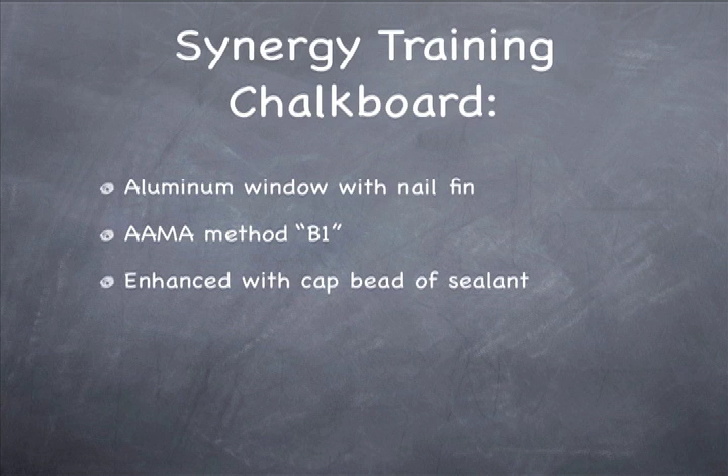We installed an aluminum window with a nail fin using AAMA Method B1. We enhanced our installation with a cap bead of sealant, and we used a membrane pan system. This is also referred to as a drainage method of window installation.

Of all the details you have to get correct, and you have to get them all correct, the most important detail is the rough opening. Without a good rough opening, nothing good's going to happen. If you or your guys walk up to a rough opening that's incorrect, I want you to not install the window.

If you're using a pan system or a drainage method of window installation, the rough opening width should be 3/4 of an inch wider than the net frame size of the window. If you're not going to use a pan system or a barrier system, the rough opening width should be 1/2 an inch greater than the net frame size of the window. The difference is the buildup of materials—pan system has more materials, needs a little wider rough opening.

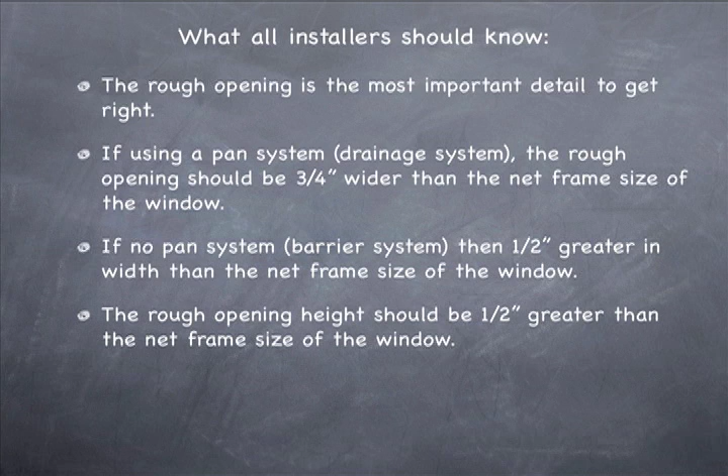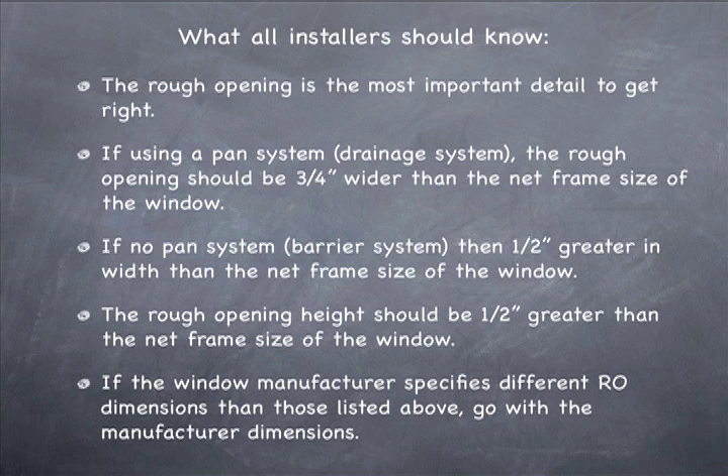The rough opening height should be 1/2 an inch greater than the net frame size of the window. In the unusual circumstance that a window manufacturer has actually supplied you with almost any information at all, if their information conflicts with what I'm telling you, go with the window manufacturer's dimensions. It's probably not going to happen, but if it does, use the manufacturer's dimensions.

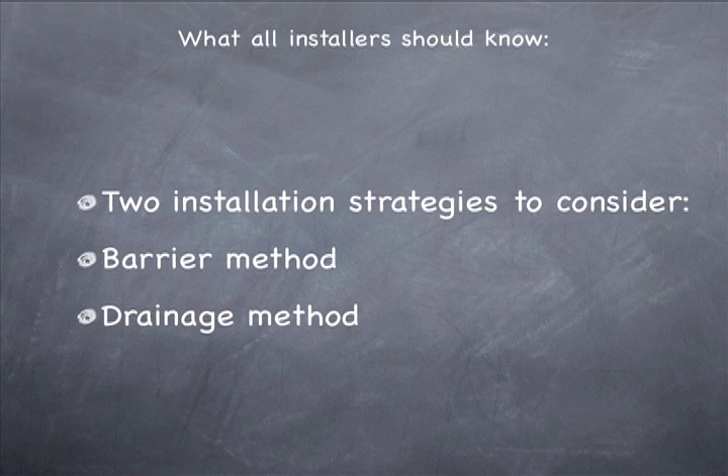You've got two installation strategies to consider: you can use a barrier method, or you can use a drainage method. I'd urge you to base your decision upon your philosophy about whether or not all windows are going to leak someday.

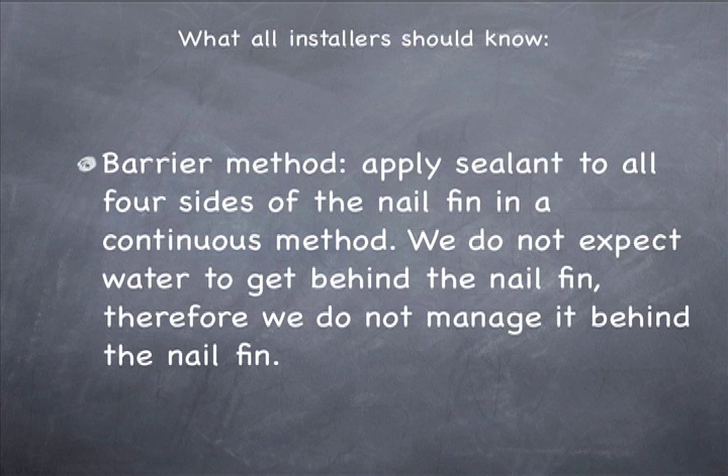A barrier method: we apply sealant to all 4 sides of the nail fin in a continuous method. That's because we don't expect water to get behind our nail fin. Therefore, there's nothing to manage, no water to manage.

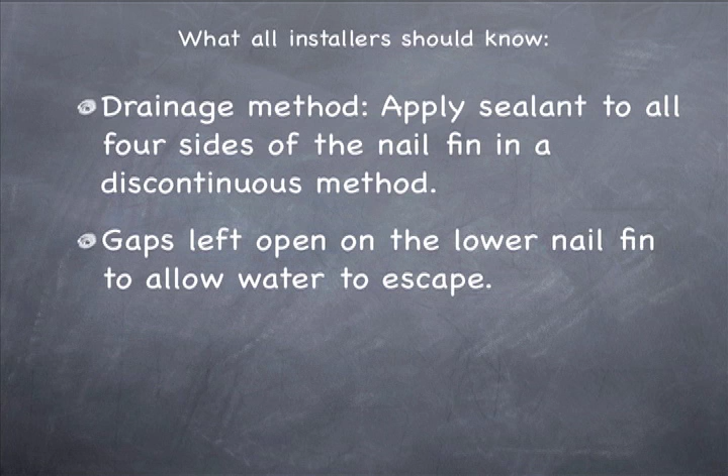A drainage method: we apply sealant to all 4 sides of the nail fin in a discontinuous method. We're going to leave gaps, 3-inch gaps, at the lower nail fin to allow water to escape. This is because we expect water to get behind our nail fin at some point in the future, so we're going to manage that water with the pan system.

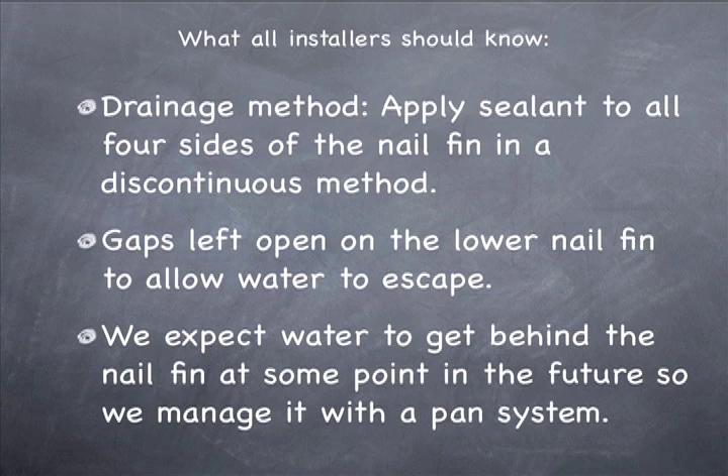Now, I get this question a lot: what is flashing? I think everybody, especially a window installer, needs a good definition for flashing, and here it is. Flashing is sheet material that's used to span gaps and manage water away from areas of the wall system that are designed to be kept dry.

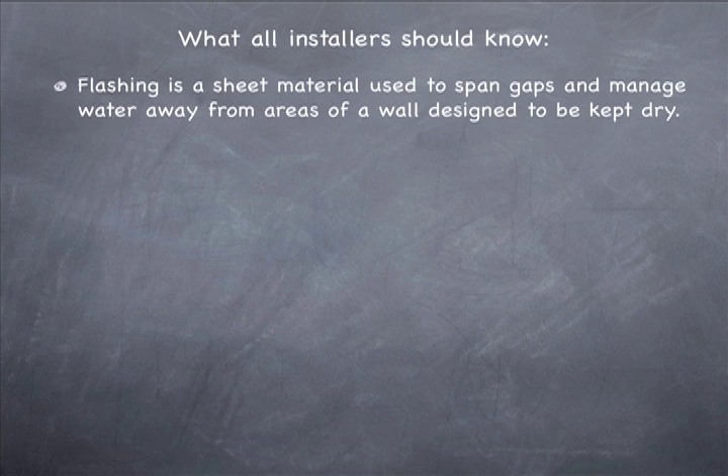AAMA Method B1 uses side flashing that's under the side nail fins. That's the main difference between the B1 method and the A1 method. In the A1 method, flashing goes on top of the nail fins.

All your flashing products should be 9 inches or wider. You're normally going to have a choice between 9 and 12 inches, and either of those choices is fine. I'd urge you not to use 6-inch.

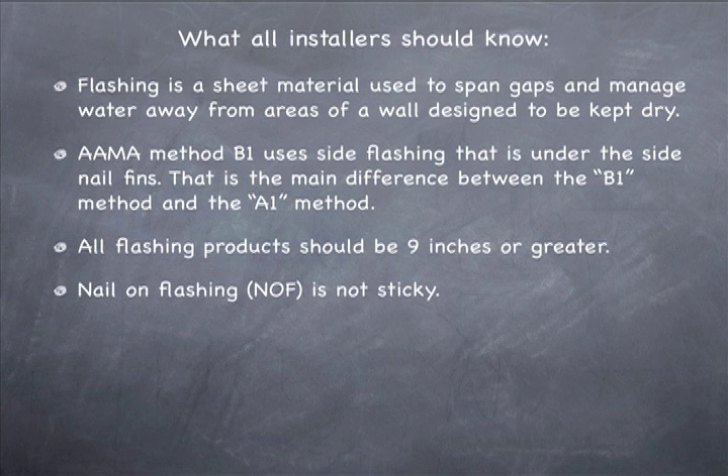NOF, you'll see in print, stands for nail-on flashing, and it is not sticky. SAF, self-adhered flashing, has a release sheet and is sticky after the release sheet is removed.

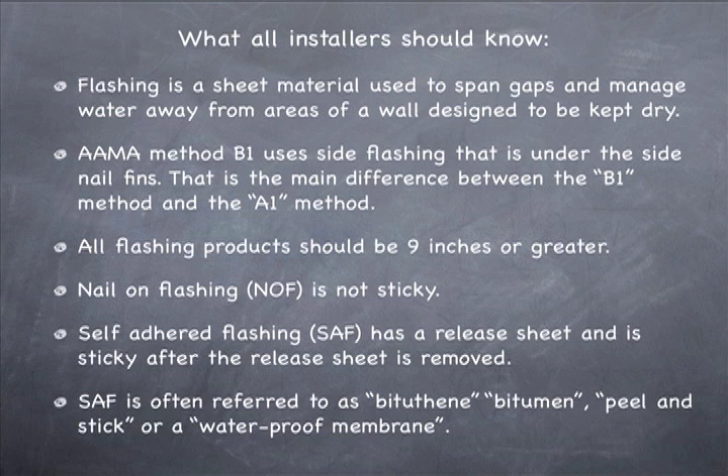SAF is often referred to as bitumen, a peel and stick, or just a waterproof membrane. SAF membranes are most commonly made from SBS modified asphalts, which stands for styrene butadiene styrene, and that's way more information than you need to know.

Often this is referred to as rubberized asphalts. I want you to exercise extreme care when you're using these products over sealants. Some sealants will liquefy these materials, and that's really bad—you'll have black drips running down the side of your wall, and it's just really a bad thing. So consult your manufacturers and use sealants that are compatible with your SAF membranes.

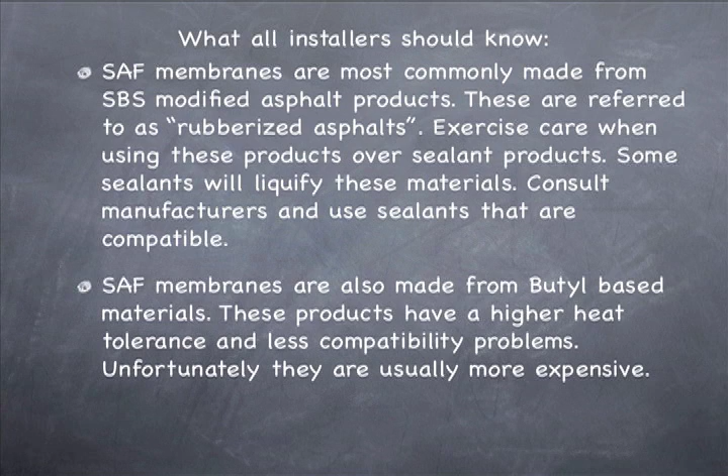Now there's another type of SAF membrane that's made from butyl, a butyl-based SAF membrane. These products are real friendly with other materials. I don't know of any compatibility issues with other sealants, and they have a higher heat tolerance. So butyl is really a terrific waterproof membrane. Unfortunately, as you can imagine, they're more money.

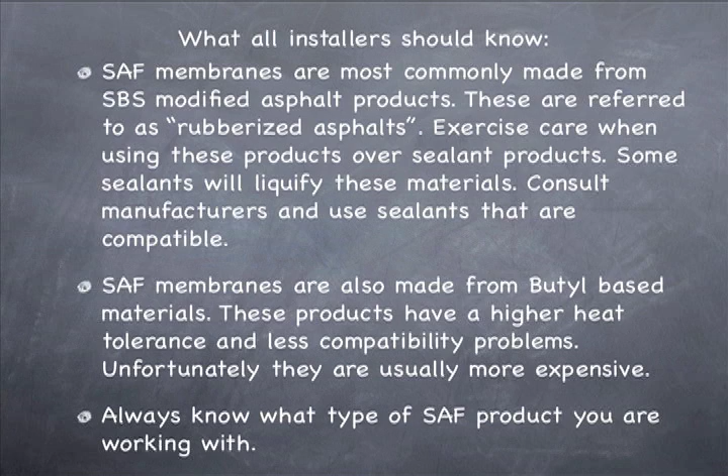You should always know what type of SAF product you're working with so you can exercise the correct amount of care when you're working with sealants.

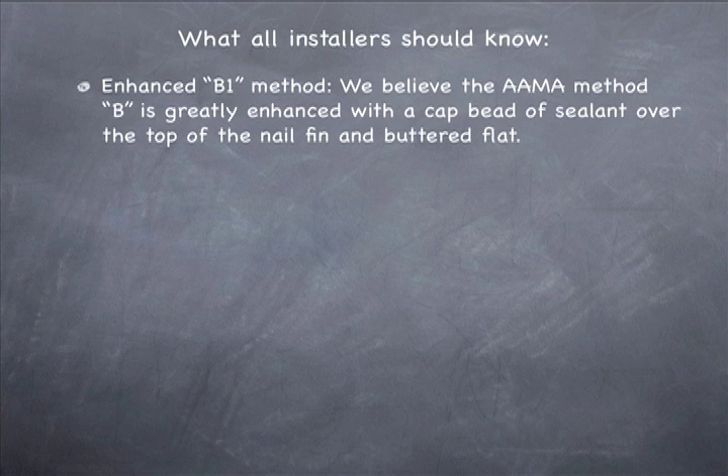The enhancement to the B1 method we believe is important, and that is where we apply a cap bead of sealant over the top of the nail fin and butter it flat. This protects against future contractors coming in and damaging our nail fin. Also, if you have a pivoting nail fin, this allows you to kick sealant into that pivot joint. It will eliminate the need for additional SAF membranes to be applied over the nail fin later.

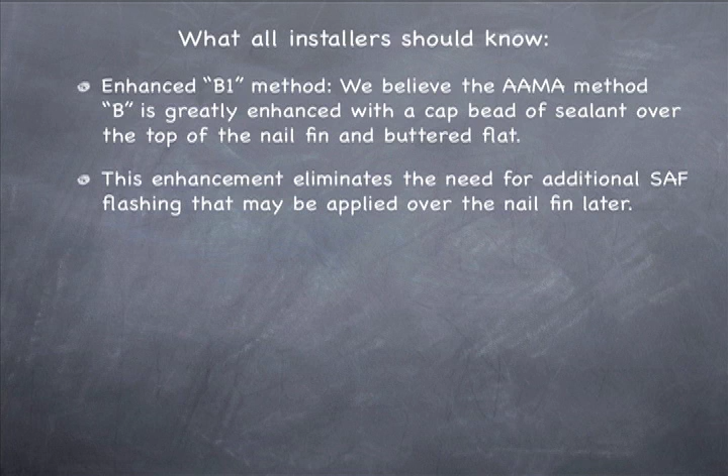Now, who's going to damage your nail fin? After you walk away from your perfect window installation, who's going to damage it? If you have a stucco home, as the lath is applied up close to the window, the lath fasteners can penetrate your nail fin and cause problems.

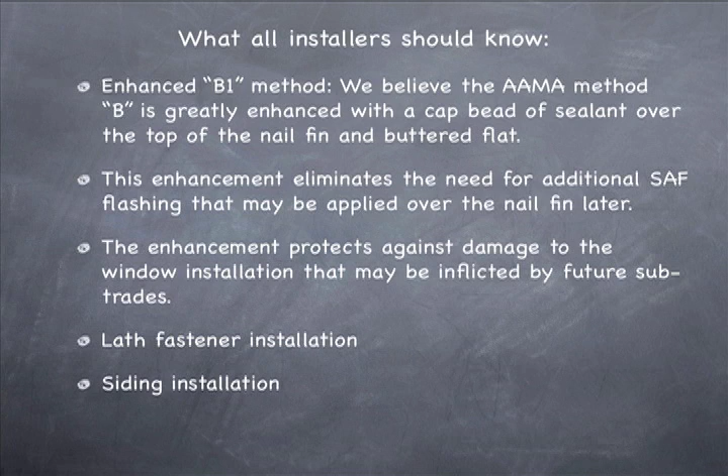Hardboard siding surrounds a window, and there are some nails that could go through your nail fin. Probably the riskiest, the most dangerous, is the installation of wood trim.

When windows are picture framed with 2x4 trim on the outside, the nails that go through that trim kick right through your nail fin, and it can cause a shocking amount of water to come into the installation. It looks like a window installation leak, when in fact it's not. So the enhancement will protect against these eventualities.

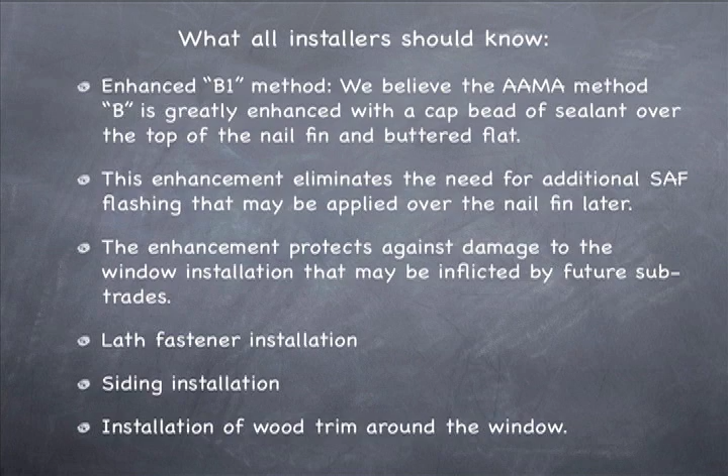Rigid head flashing drip cap should be installed before the WRB is layered on top of the nail fin, and it should be pressed into wet sealant.

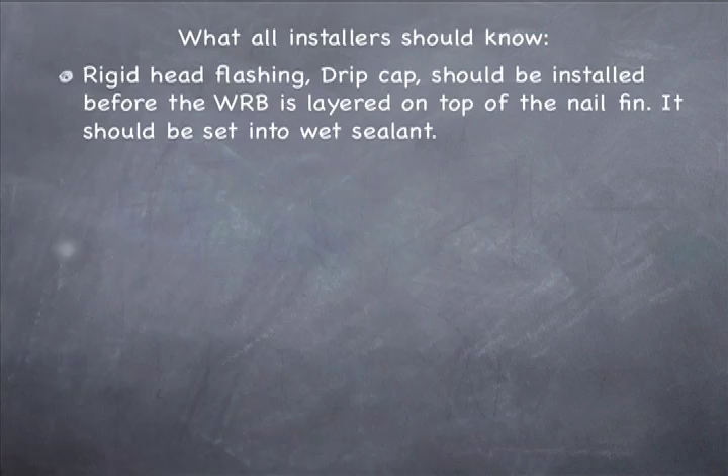We believe the best fasteners to use are exterior grade screws that are 1.5 inches or longer. We use gold deck screws. You could use galvanized deck screws. Any kind of screw designed for exterior use that's 1.5 inches long or longer is great.

We like screws because you can control them easily - how deep they go, how tight they get, and you can back them out if you need to. But maybe the biggest benefit is you're not swinging a hammer into the side of your window. We've seen a lot of errant hammer strikes that have caused serious problems to expensive windows.

If you're going to use nails, fine, use galvanized nails, 8-penny or bigger. I urge you to use a nail gun. Paslodes are great. If you're using a Hitachi or one of the big nail guns, just turn your juice down so you don't damage your nail fin. Turn that puppy down.

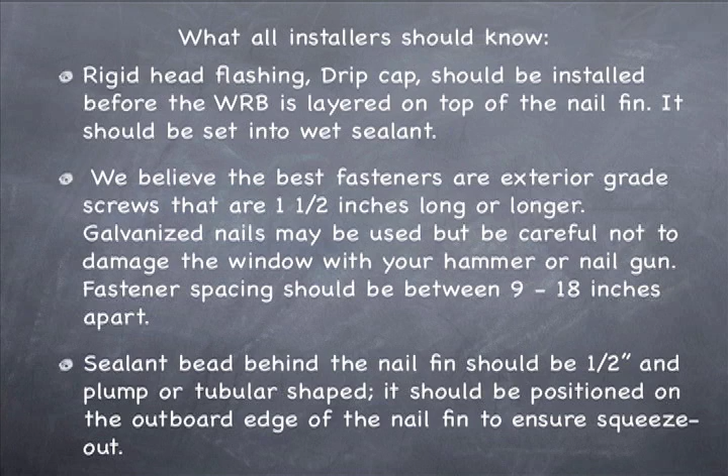Sealant behind the nail fin should be a half inch bead, nice and plump, tubular shaped. It should be positioned on the outboard edge of the nail fin to ensure good squeeze out.

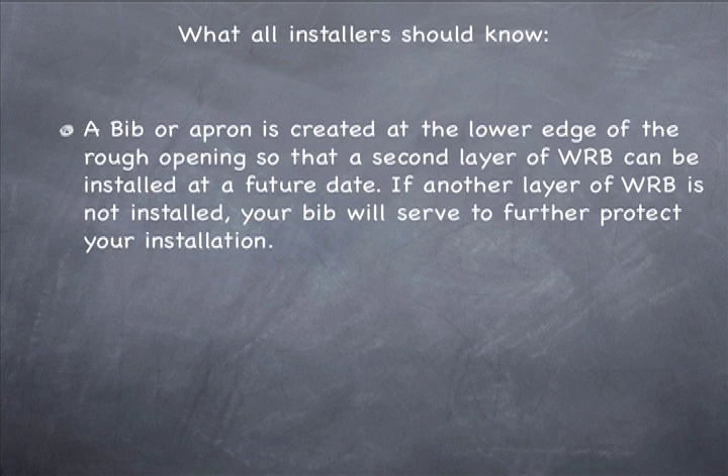A bib or apron is created at the lower edge of our rough openings so that a second layer of WRB can be installed at a future date. And if they decide not to use a second layer of WRB, you're simply protecting your rough opening. The bib goes a long way in helping to protect your window installation, so it's good whether they use a subsequent WRB or not.